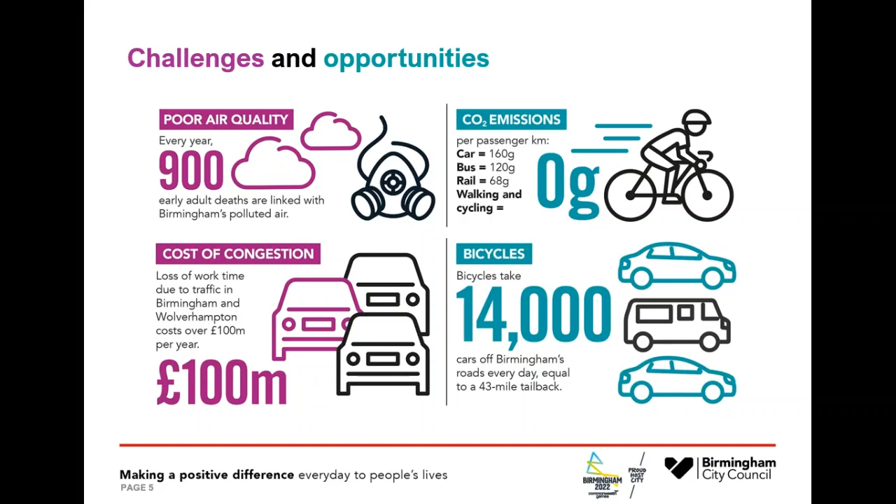Surveys we've done show that 76% of Birmingham residents support the principles of cycle tracks and cycle facilities across the city, and 65% would support that even if it means there's less room for other road traffic.

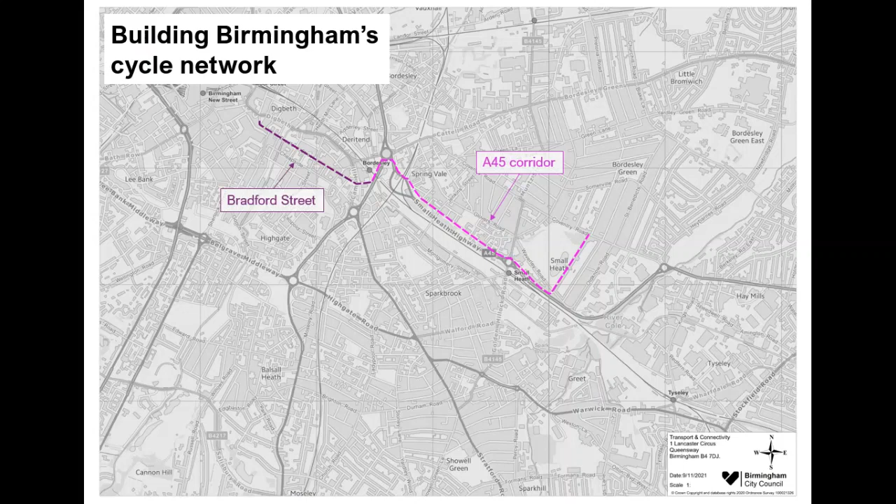This just shows how that fits into the wider context. There are already routes along the canal and along river valleys, which give more options and connect well to the routes we're talking about today. Off-road routes aren't always suitable because, particularly after dark, they're not so attractive, so we do need to try and get routes on the carriageway as well, in lit areas.

This also reflects longer term aspirations. Some of the dotted lines show things we would like to do in the future, which enhance connectivity and connect residential areas much better with things like employment, education, shops, and health facilities.

There is hope that there will be a phase 2 to the A45 corridor, subject to further funding coming in the next few years, which will also provide facilities on the dual carriageway section of Coventry Road, at least out to the Swan, and potentially even further in the future. But that's for the future, so we're focusing today on the section of Bradford Street and then the A45 corridor through to the park.

Okay, so I'll introduce now Alex Kernan, who's going to talk through the details of the specific proposals.

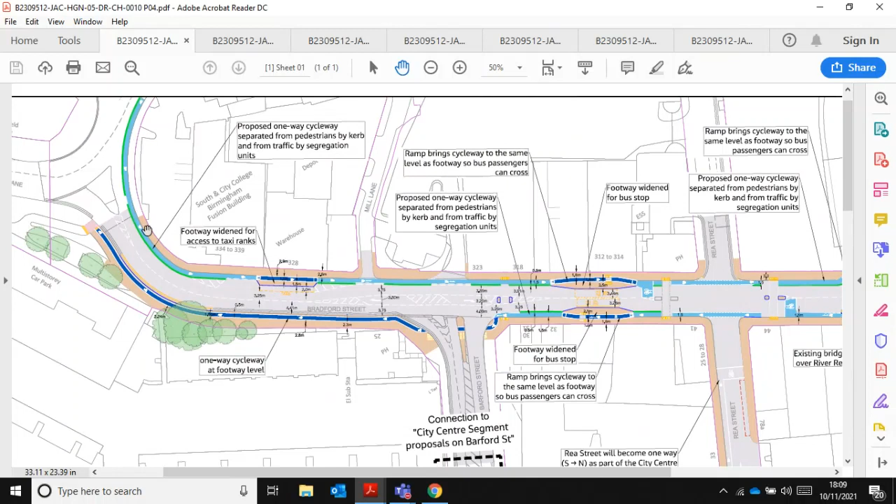This cycle route will be at road level, separated by a full height kerb. There are areas where the cycle route comes up to footway or pavement level, where we've got areas such as taxi bays, which you can see here. It just allows people to cross over the cycle route and safely queue for taxis.

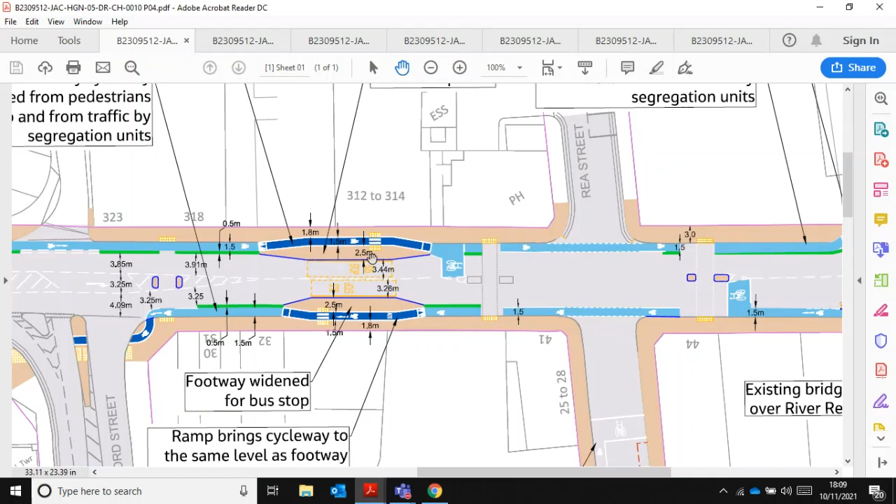We've implemented the same proposal for bus stops as well, where we've got a bit of a border there for people to queue and alight the bus. That creates a nice, safe space, segregated away from the cyclists.

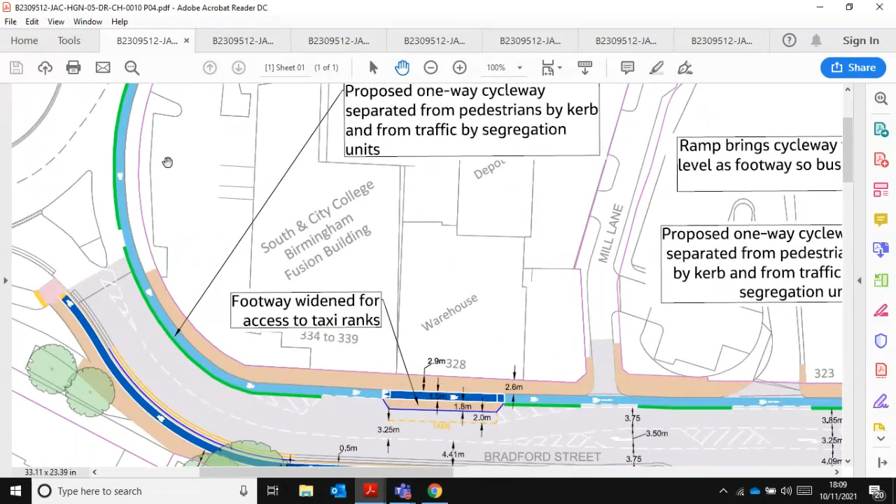Now the proposal is to allow cyclists through this route to have priority, as you would using a vehicle, so they will have priority at junctions. The plan is shown in blue at the moment for the whole route, but that is just for illustrative purposes only.

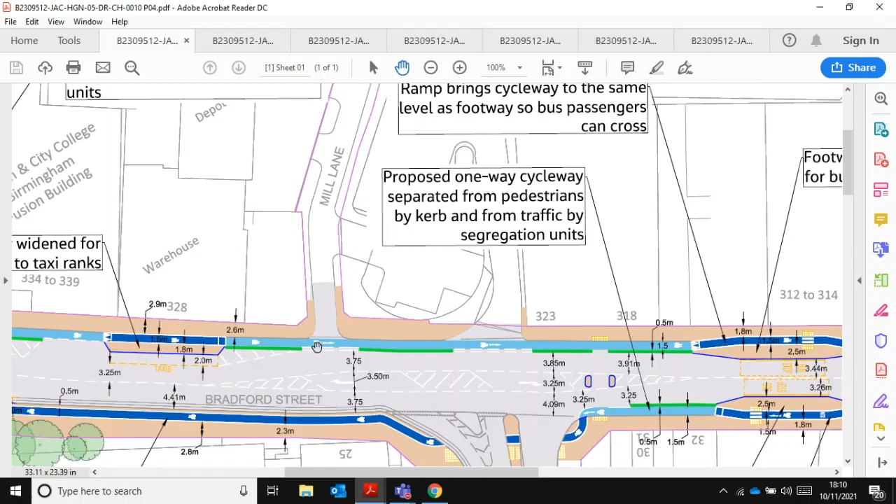What we're proposing is, where cyclists would be crossing over junctions, we'd implement blue surfacing there, just to highlight to vehicle users that there is in fact a cycle lane and that they're to give way to the cyclists. You can see that observed all the way through the route here.

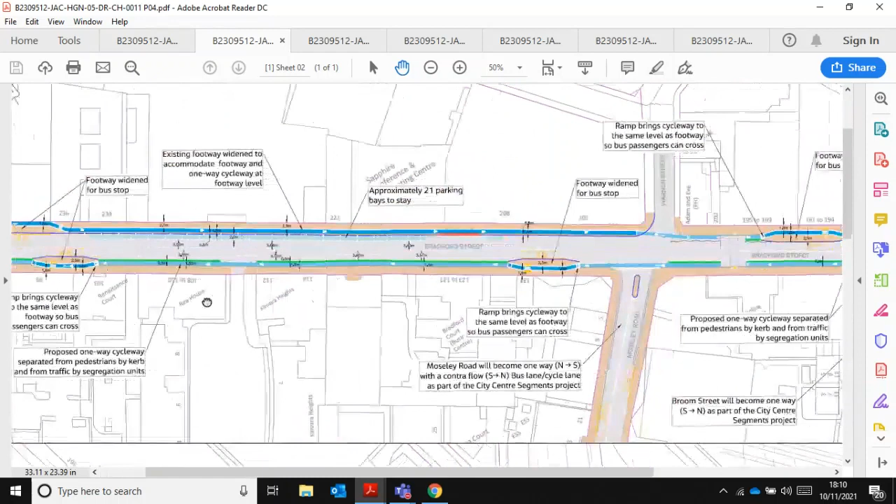There are some crossing upgrades further along the route. So what we'd need to do is just upgrade signals so that we could allow cyclists to have priority through the junctions here.

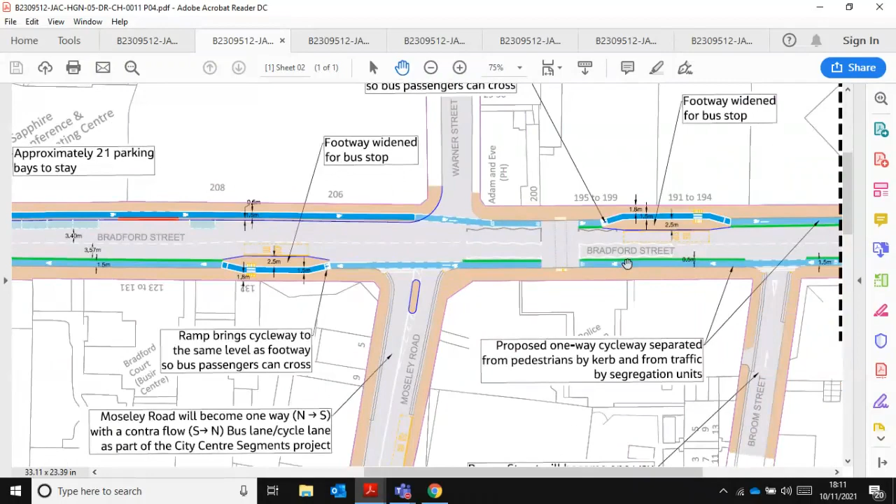We've also tried to retain as much parking as possible on the streets, because I know that's quite important as well. Where we can, we've kept the parking bays as per the existing, noted on the drawing here - approximately 21 parking bays to stay. We've tried to reallocate some of the parking bays on the southern side of the plans where possible, which keeps some of the parking in situ along Bradford Street for anybody using this route.

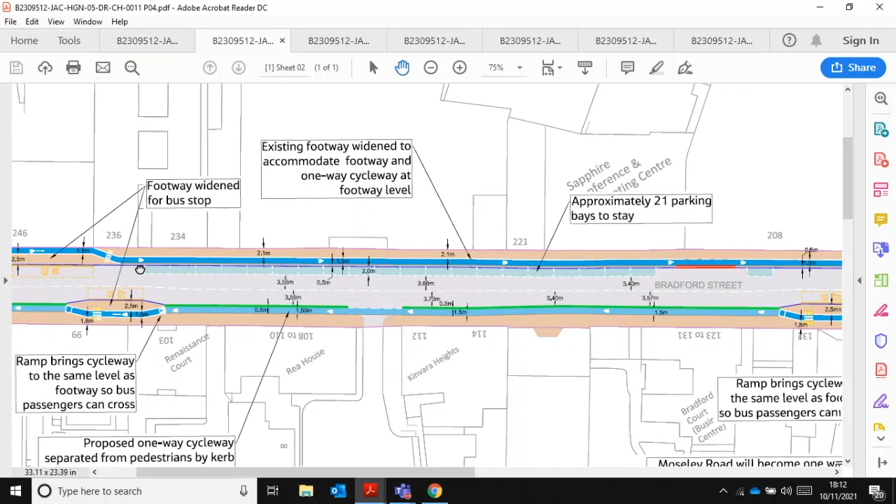So yeah, I'm just going back through the plan to the start there. As you can see, there are some areas where cyclists will be asked to rejoin the footway in a segregated capacity, and it will then be dropped back down in certain locations to carriageway or road level.

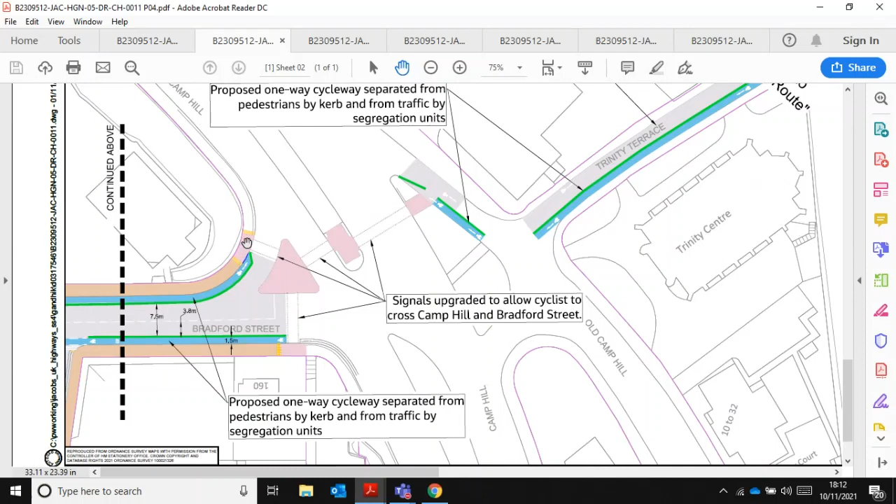That follows all the way down, past Warner Street, Moseley Road, past Broom Street, and takes you to the last part of the plan, where we've still got the with-flow route up to Camp Hill junction, where cyclists are asked to rejoin the footway for a little section of shared use on both sides, and then need to use the upgraded signals, which should be toucan crossings, bringing them back to Trinity Terrace.

That connects onto the A45 route that's currently on site. The A45 route is currently segregated by orange bollards, which you've possibly seen on site. Those are proposed to be replaced with actual curbs.

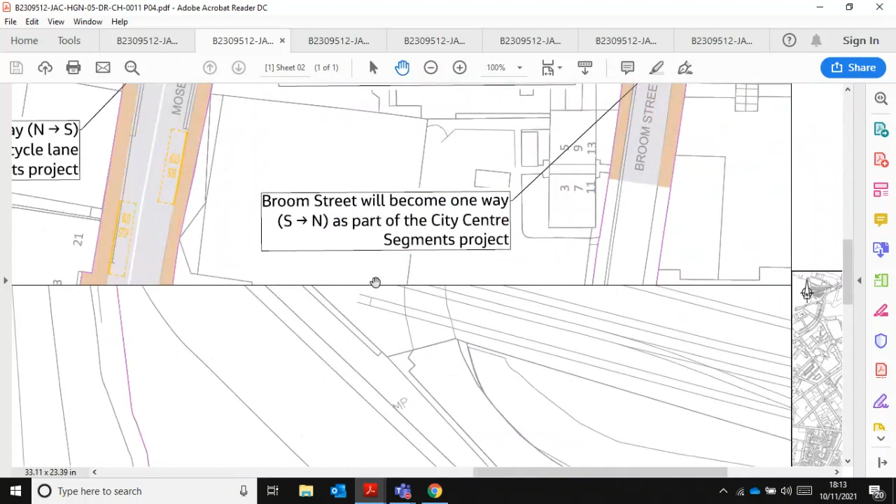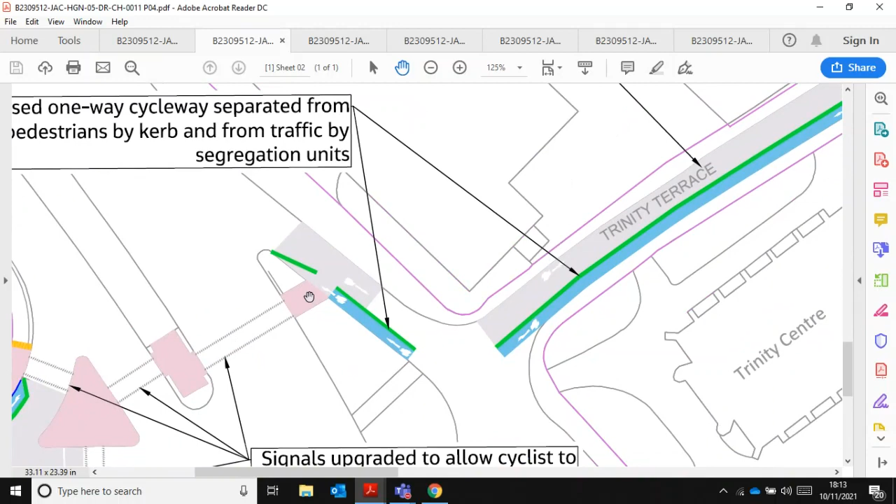So when we've got to the signalised junction here by Trinity Terrace, if you were coming from Bradford Street, you would then rejoin the carriageway for a section of on-street cycling. It would just be an advisory route because it's quite quiet around here, so we'd expect the traffic is quite low.

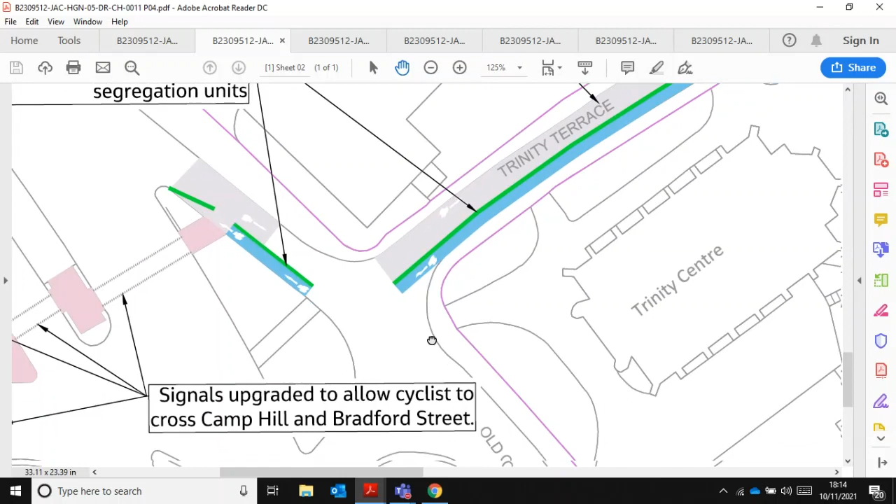If you were coming from the A45 scheme, which I'll go through in a second because that's where it ties in, you would be coming contraflow to the traffic along a segregated route, and then you would rejoin just to cross the oncoming traffic, which is relatively low through here because it's just a little bit of a slip road, so not heavily trafficked. It would just be a bit of a crossing and then back up to the Toucan crossing where you could use the Bradford Street facility.

Hopefully that will encourage cyclists to start using this route. And that's Bradford Street. So what I'll do is just continue onto the A45.

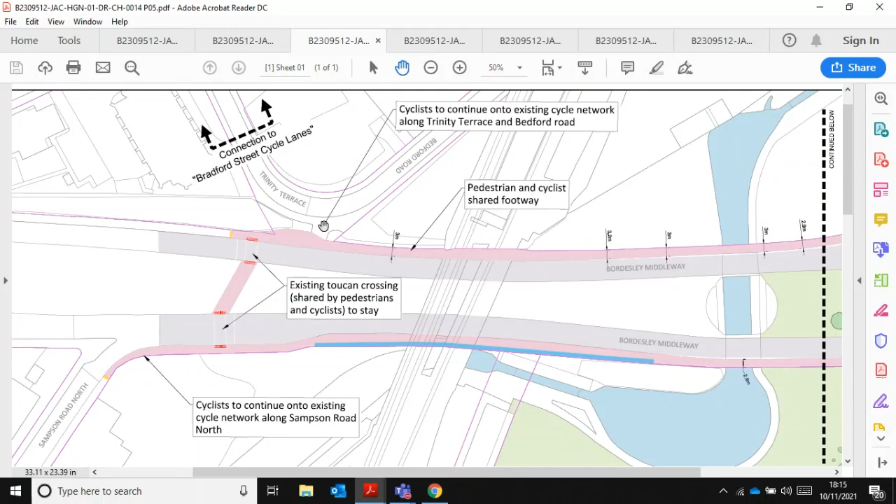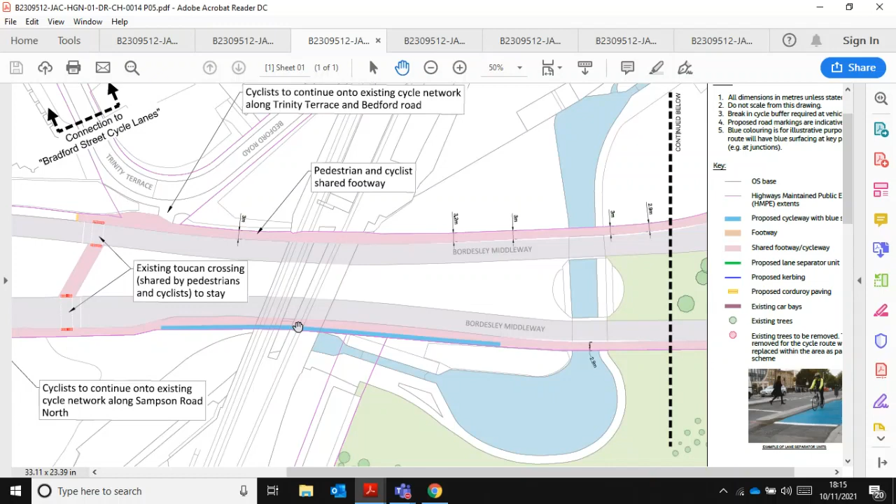On the A45, we've got the end of Trinity Terrace here, where the other drawing finishes. That connects onto the Bordesley Middleway here, where we've got an existing toucan facility. What we're actually proposing to do is extend the shared use footway, where you can see the pink space. Shared use means both cyclists and pedestrians can use the existing footways, so they won't change. It's just a case of allowing cyclists to use those pavements as well as pedestrians.

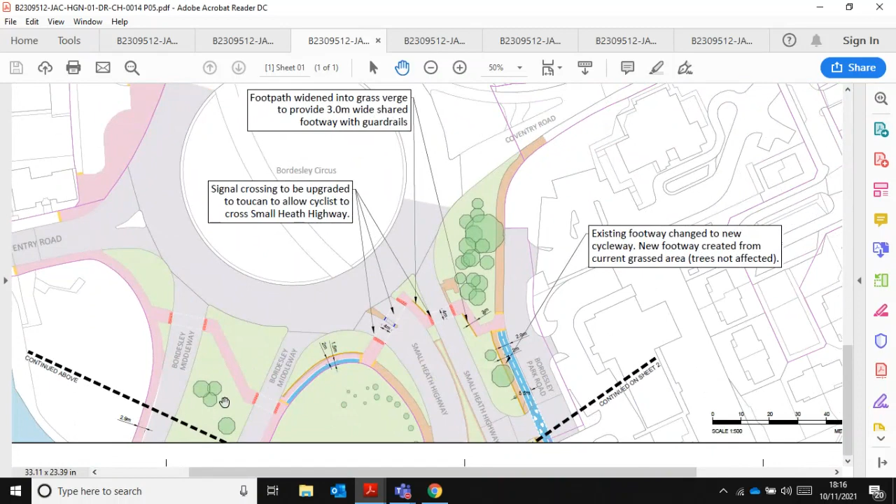So then the scheme plan rejoins here at the end of Bordesley Middleway, junction to Bawdsley Circus Island. This connects onto other existing shared use routes along Coventry Road, etc. But our scheme for the A45 connects on here.

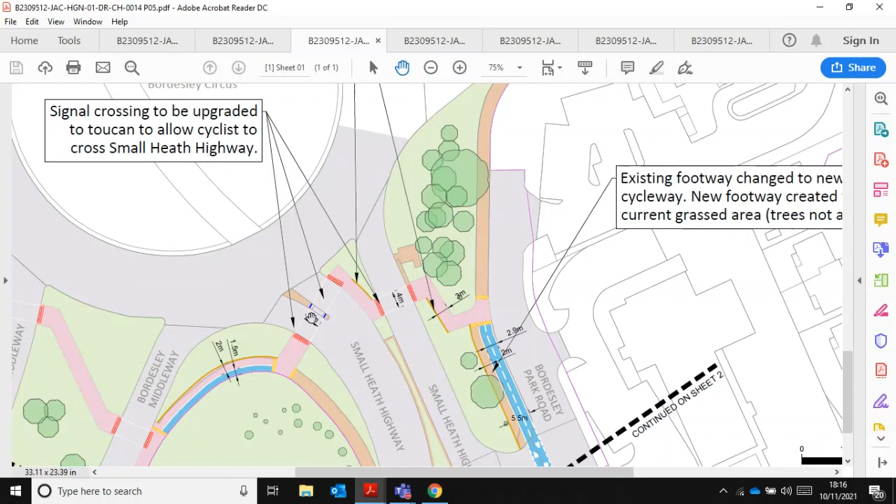We've got an area where we've got a little bit of segregated cycleway, segregated from pedestrians, just on the corner of Bordesley Middleway to Small Heath Highway. We've then decided to upgrade the crossing at Small Heath Highway to a toucan, so again that's for pedestrians and cyclists to cross over and use the existing traffic signal facilities, but it'll be slightly wider to accommodate the cyclists as well, just so there's a bit more room.

So cyclists can cross over the Small Heath Highway and then join onto Bordesley Park Road, where they will be in their own segregated facility away from the pedestrians, which will be in both directions.

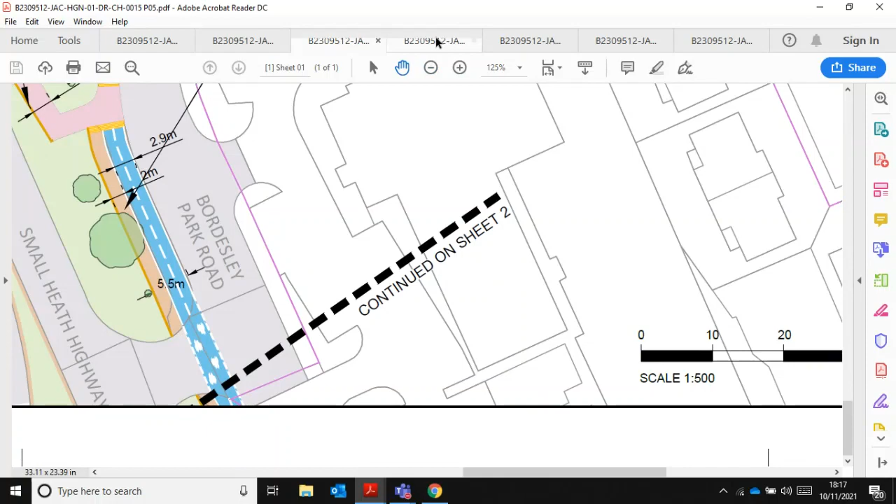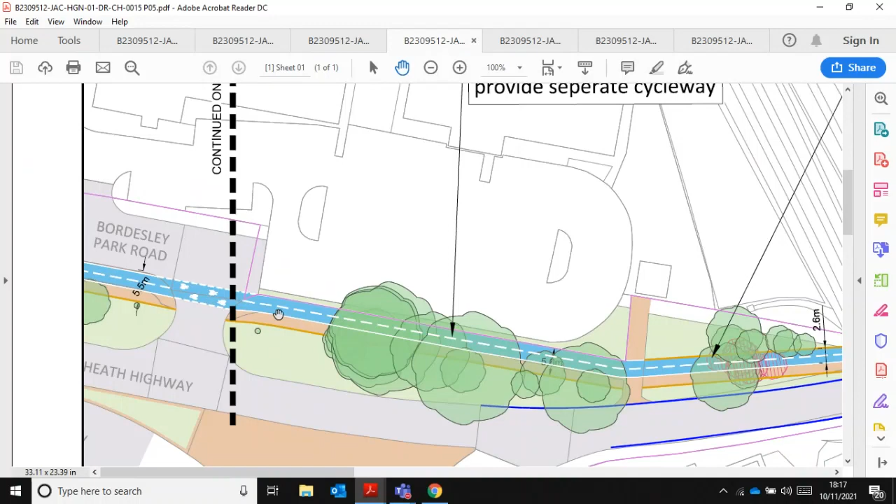If I just carry on with the plans, you can see we've just tied into Bordesley Park Road here. We're proposing that the two-way cycleway continues as per the existing pop-up route through this section.

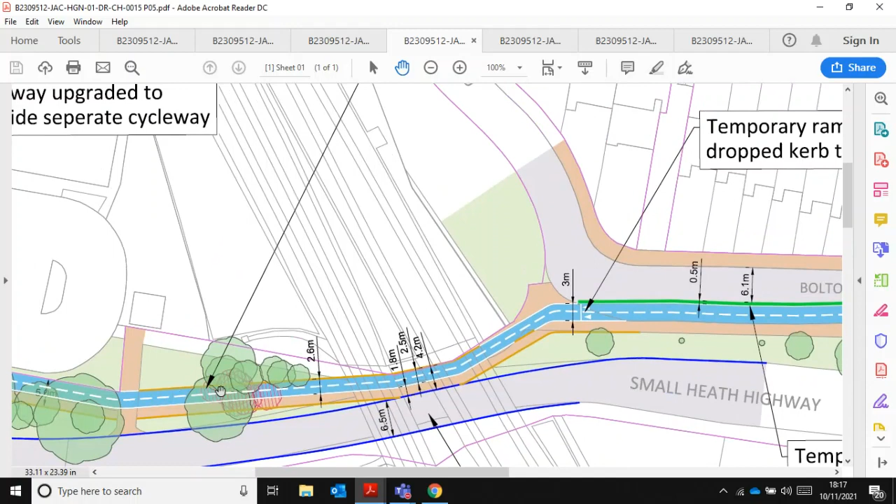We're going to formalise the section just under the railway bridge as well. So rather than just having matting through there, we're going to do some paving and tarmac through here, just so we can increase the longevity of that section.

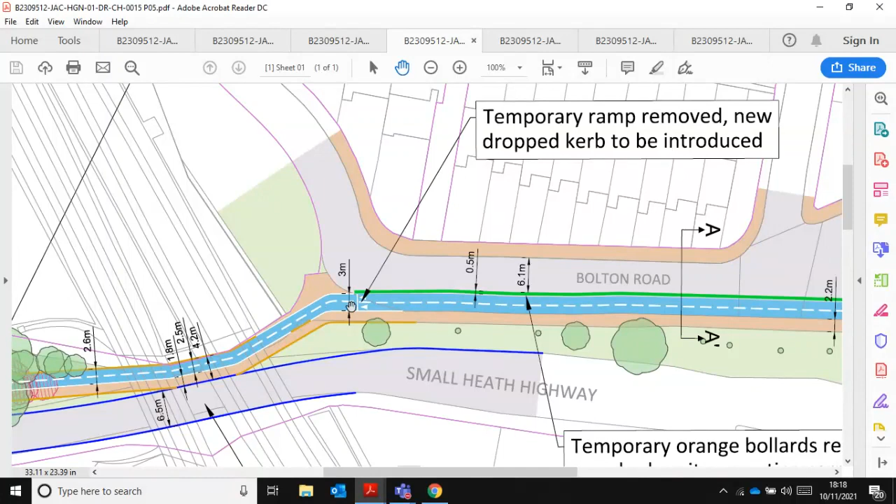We then come under the bridge up to Bolton Road, again just following the existing bi-directional or two-way cycle route.

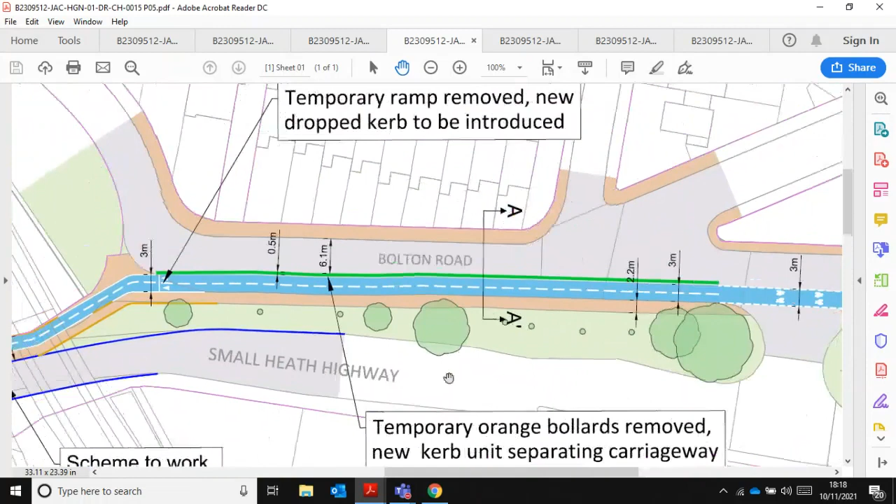Now, Bolton Road is one way currently with the pop-up route. We're actually proposing now that we will reinstate the two-way, which will make it easier for residents. We've listened to the feedback we've received and taken that on board, so hopefully that will ease any issues on Bolton Road currently.

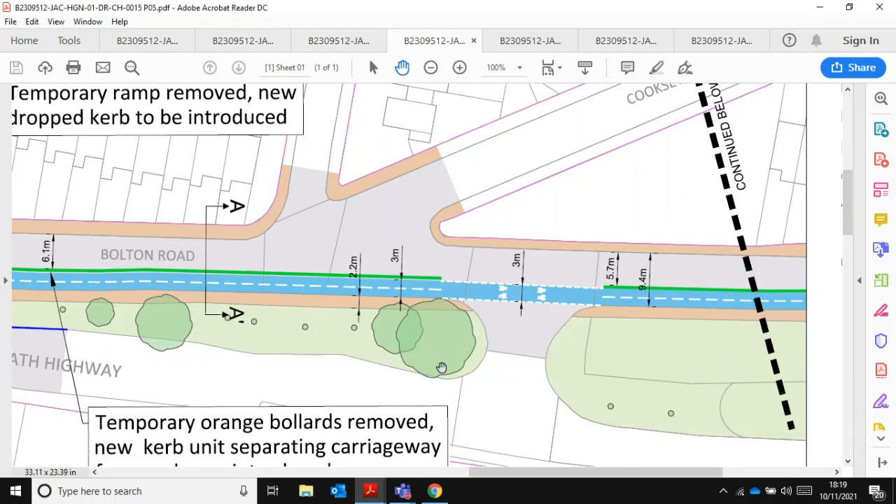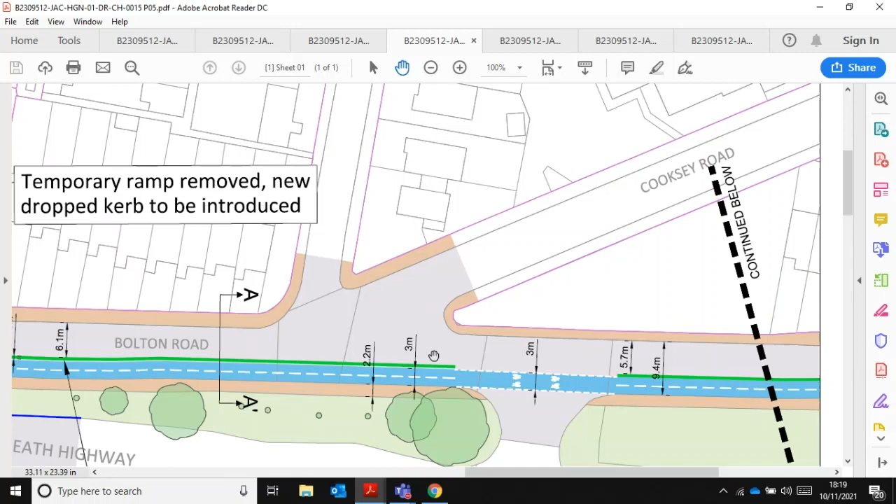So with the Bolton Road cycleway, we've shown the segregated kerb. Obviously, we will allow for some gaps in these kerbs just to allow cyclists to alight and gain access if they need to, if they live in the local area and they've cycled into Birmingham. It just gives a little bit more access to join the route.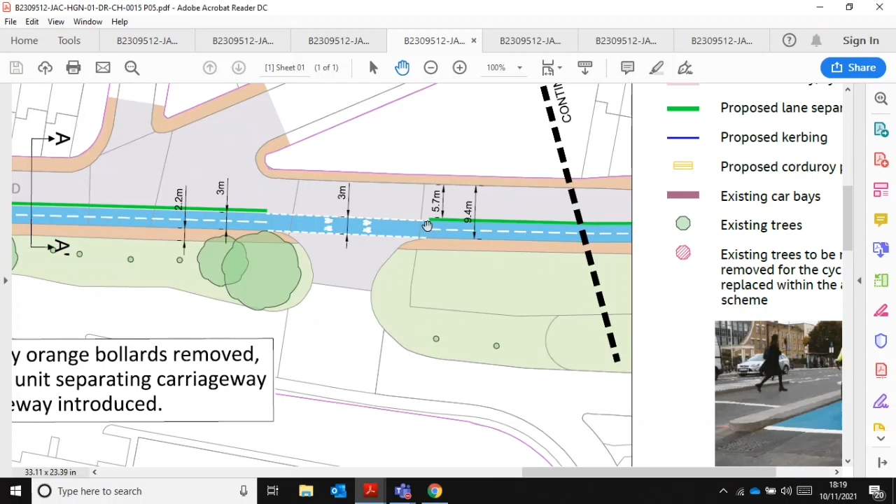As I say, at junctions we will have the blue surfacing through the junction, because cyclists again will have priority where junctions are situated, and it just shows vehicle users that they need to be aware of cyclists. So I'll continue on.

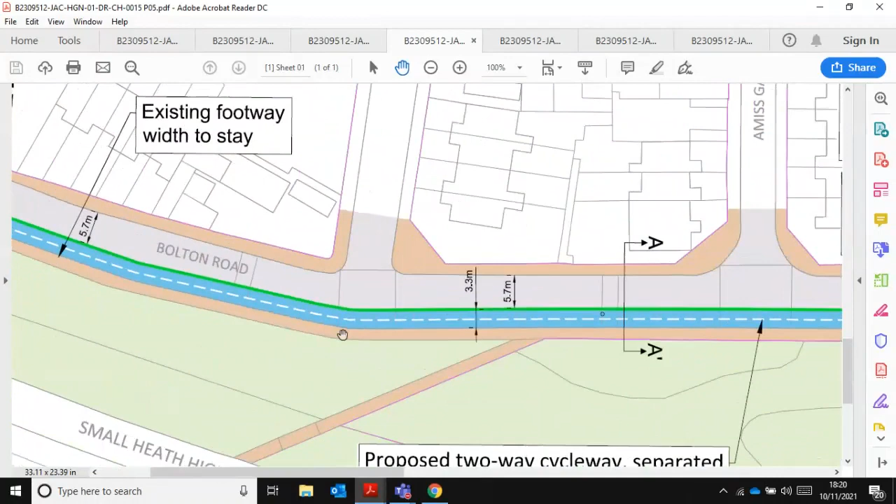So showing the rest of the length of Bolton Road here, again with segregated curbs. Didn't mention that this will be at road level as well, so it won't be at the footway level, and the footway will still be usable as it is now.

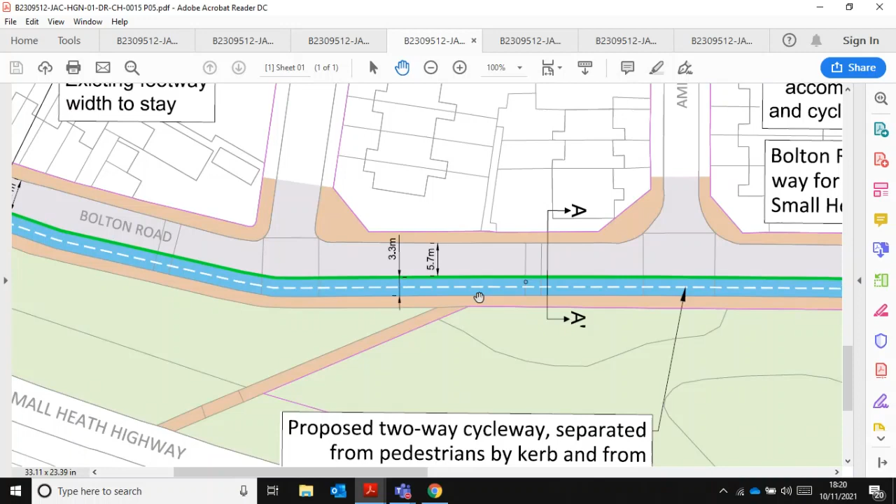So you'll just have a cycleway next to it rather than having the traffic. But again, as I say, it will be two-way along Bolton Road as well, so we've managed to fit that in.

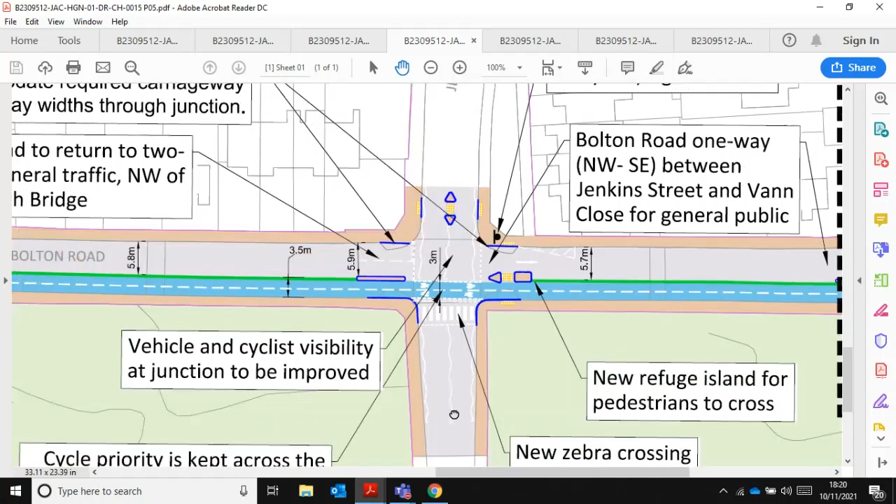This is where we have made some additional changes from the existing layout of the Small Heath Bridge junction to Jenkins Street and then Bolton Road towards Vann Close. I'll just go through that now.

What we're proposing is to change the priorities at this junction, as we feel it may flow better. On Bolton Road, vehicles would be expected to give way to oncoming traffic from Jenkins Street or Small Heath Bridge, so Jenkins Street and Small Heath Bridge would have priority straight across. That's not how it's operating now.

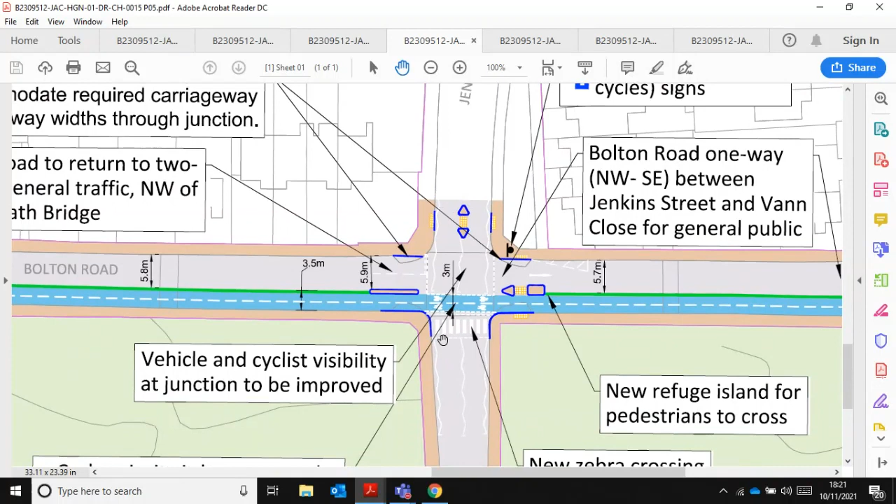At the moment Bolton Road has priority, but we feel it would be more effective to have Jenkins Street and Small Heath Bridge with priority, to allow the junction to flow better and have a bit more visibility, because some comments we received were that vehicles are protruding onto Bolton Road because of the wall just beyond here. So rather than cars edging out into oncoming traffic, it would be better to give them priority, since Bolton Road has a bit more visibility at the junction.

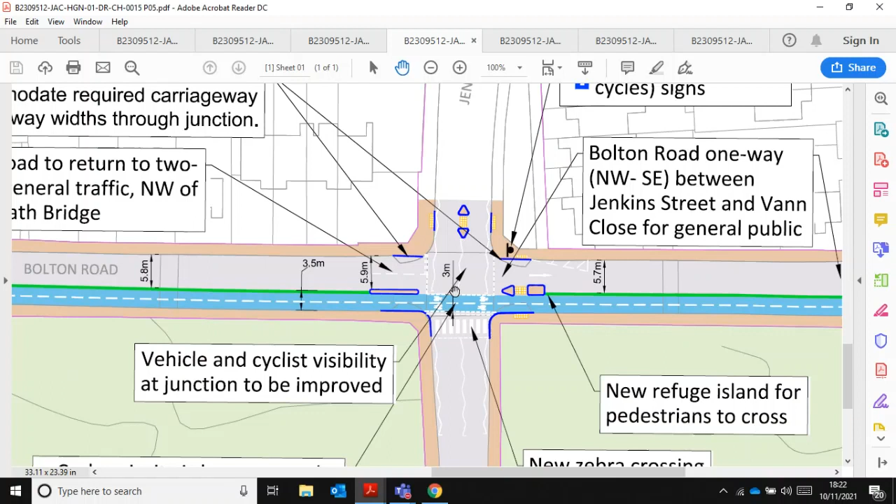So that's what we've suggested. This side will still give way, so you can turn left out of Small Heath Bridge onto Bolton Road, and you'll be able to come out of Bolton Road as previously, before the pop-up route was here.

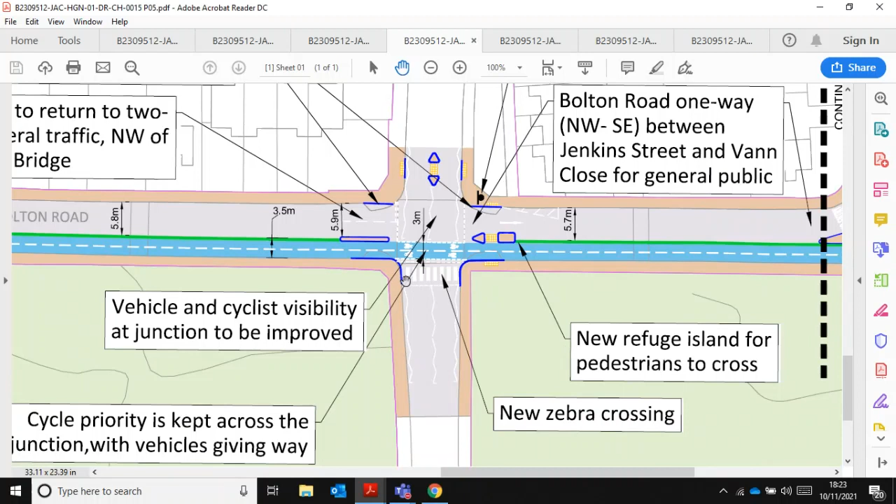We've got the proposal of a crossing for pedestrians and cyclists here. We've proposed that cyclists have priority again across the junction, just because it gives a bit of continuation and makes the route quicker for cycling. We've also proposed the pedestrian crossing here, because I think it's quite well used, so it's creating a better crossing facility.

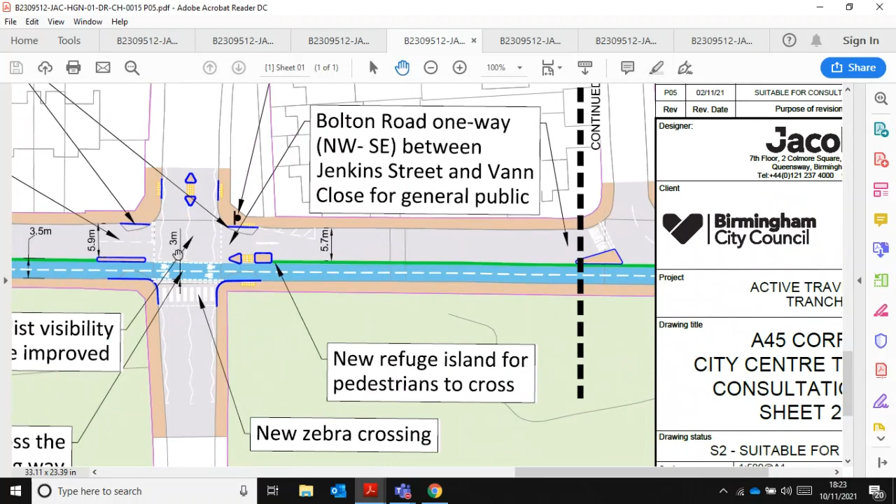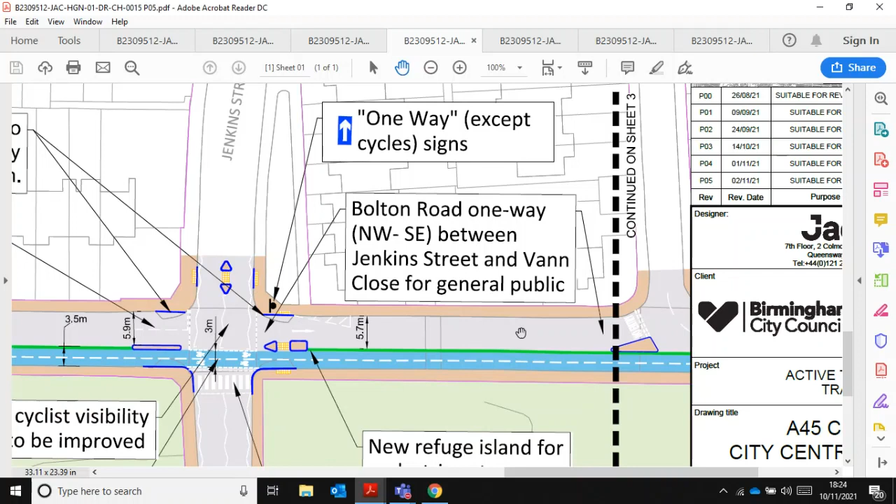This is where we've proposed to keep the one-way section, between Bolton Road and Vann Close, and the junction of Jenkins Street through to Vann Close, just to reduce the movement at this junction for vehicles. You'll still be able to come down Jenkins Street and turn left and right, but you won't be able to come from Vann Close along this section through to Bolton Road. It's only a localised alteration here.

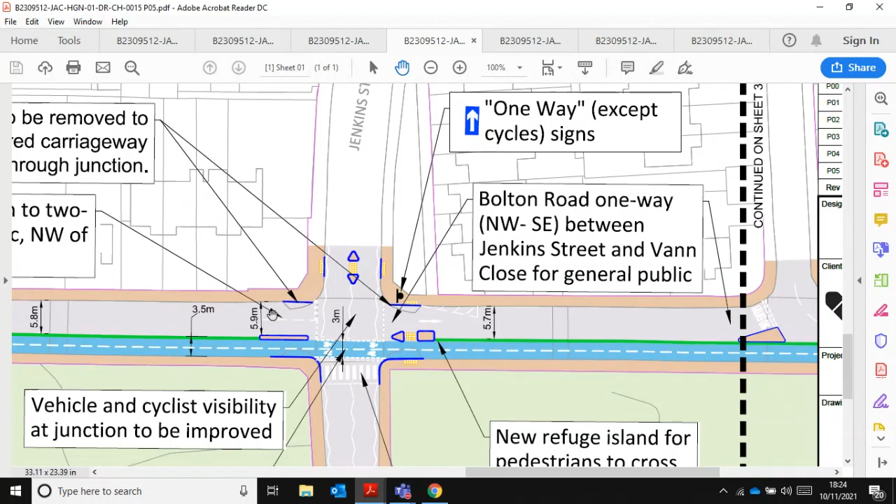So if you were travelling down Vann Close to get to Bolton Road, it's just a small diversion up to Vann Close and then onto Jenkins Street, and then the two-way can be used. But it's just to reduce those movements, to keep everybody safe and give that safer feeling at that junction.

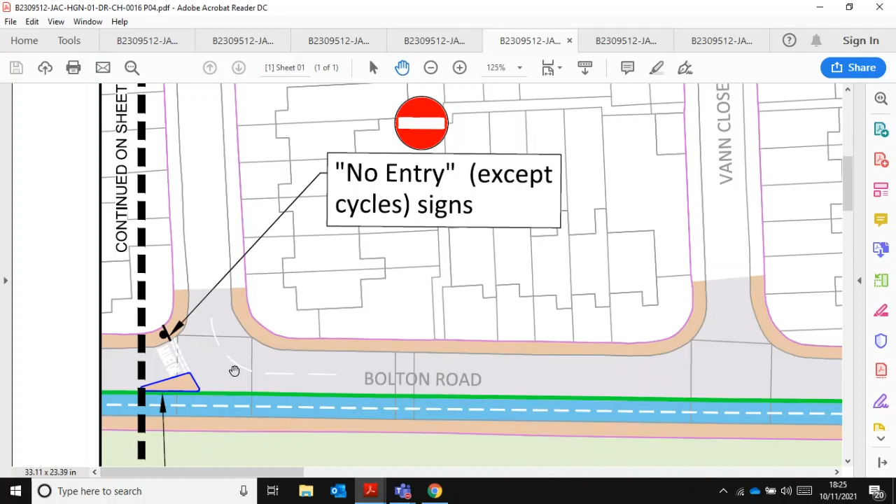I'll move on to the next drawing. As discussed, we've got that no entry here. We've proposed to do a little build-out on Bolton Road, just as you get to Vann Close, and then you would sweep up here as a vehicle user, and use the Jenkins Street route if you needed to get to Bolton Road on the opposite side.

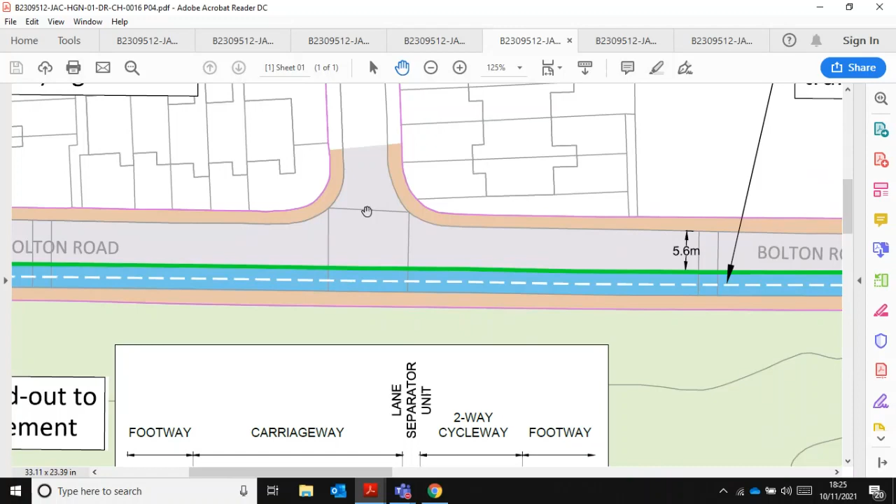Looking at the cycleway again, it's two-way along this stretch of Bolton Road on the opposite side. We will again leave gaps at junctions so cyclists can easily manoeuvre in and out of the cycle route, giving better connectivity into the residential areas for those who'd like to cycle into the city. That will again be at road height.

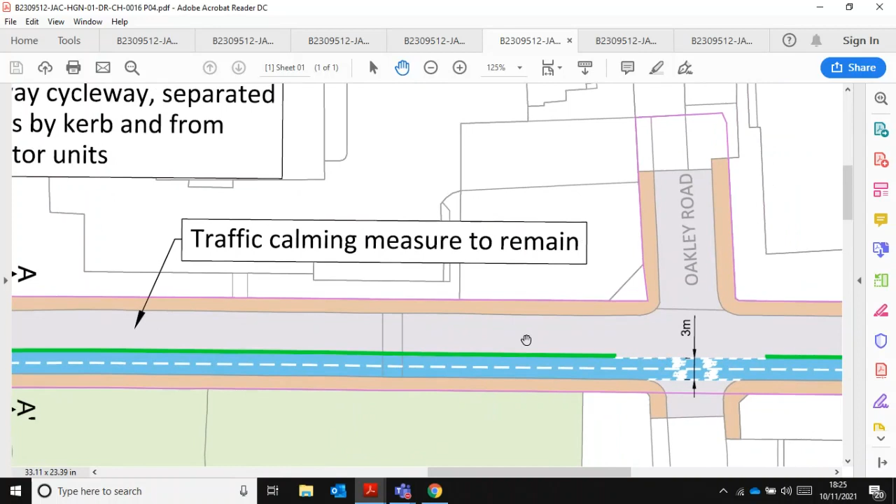Traffic calming measures will remain, which is a note we've put on the drawing. That's as per the existing - we haven't changed anything there as part of the pop-up or this scheme, so they're just in situ.

We get to Oakley Road, and again we've provided some line markings, and also we'll be providing some surfacing here to show that cyclists will in fact have priority along this route.

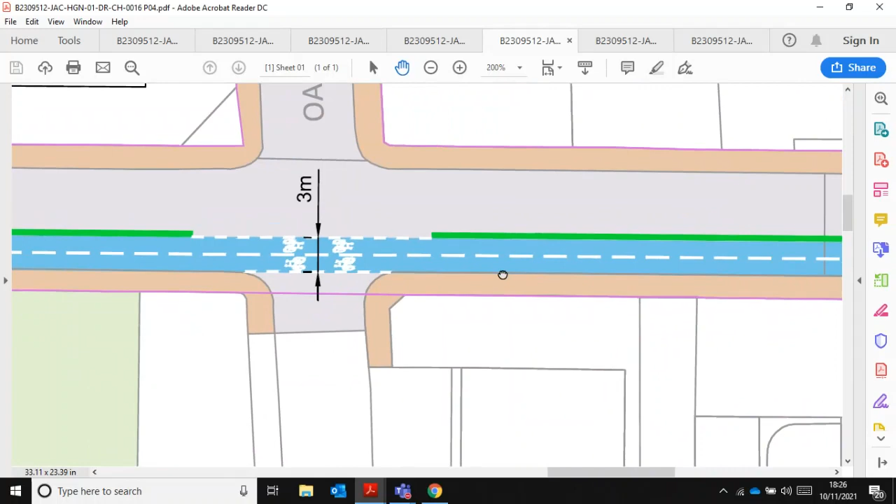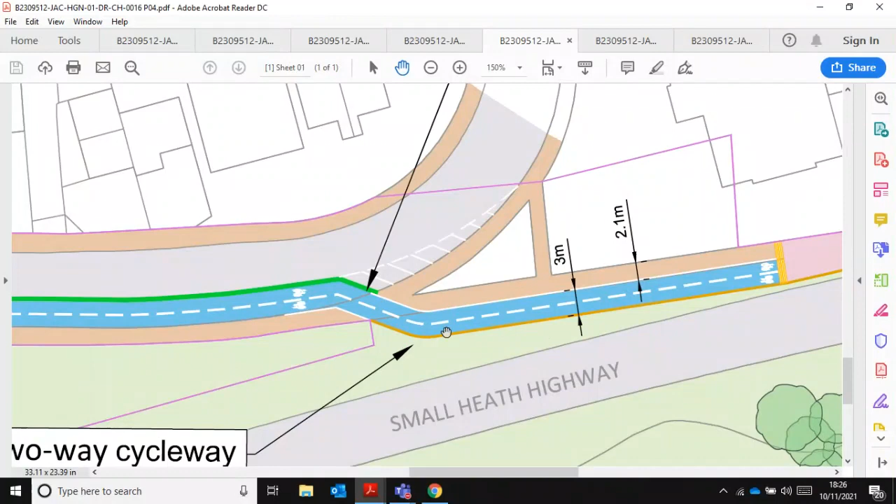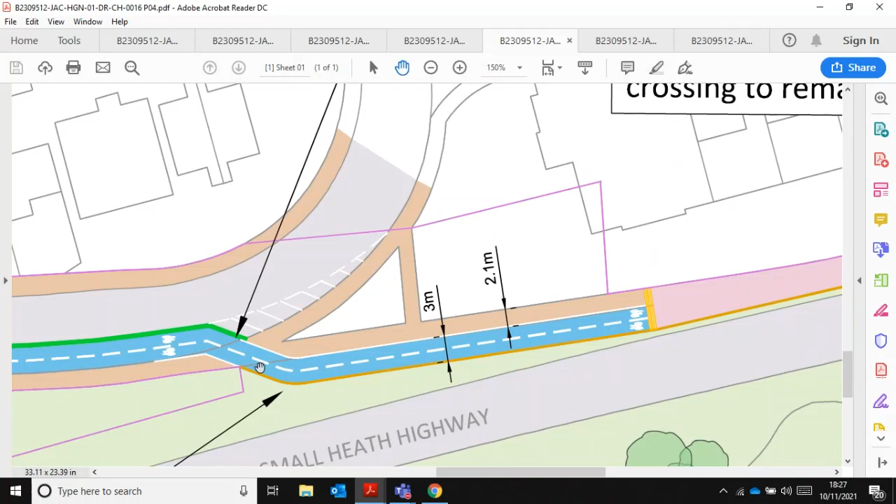Then we get to the end of Bolton Road, again following the same alignment as the pop-up scheme here. What we'll do is plan to widen the grassed area to facilitate a cycle track. This cycle track will be raised from this point up to the level of the footway, so it'll be at that same level, and it's proposed to be segregated again from the pedestrians who would be using this pink section.

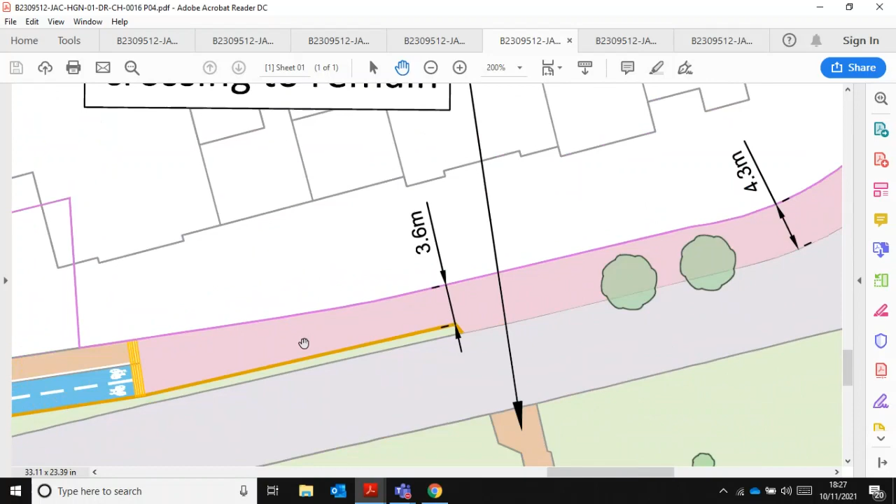That takes you up to Golden Hillock Road, pretty much. Where we've introduced those orange lines, that's tactile paving to denote that this section is for shared use - for cycling and for pedestrians through this route here.

And that goes up to an existing toucan crossing facility, which is again for cycling and for pedestrians. Scoot over to the next plan. So then cyclists would be crossing over here with the pedestrians.

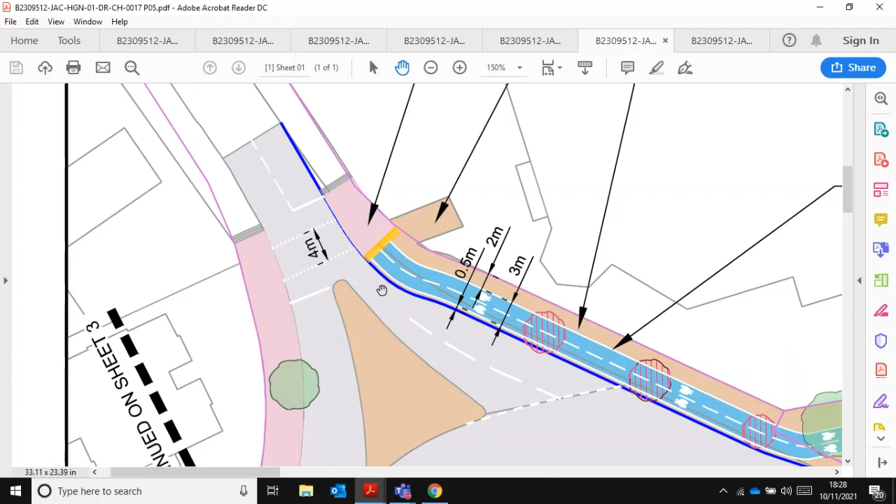What we've proposed here is that we introduce another section of segregated cycle route at footway or pavement level. It is two-way, and that's just outside the mosque.

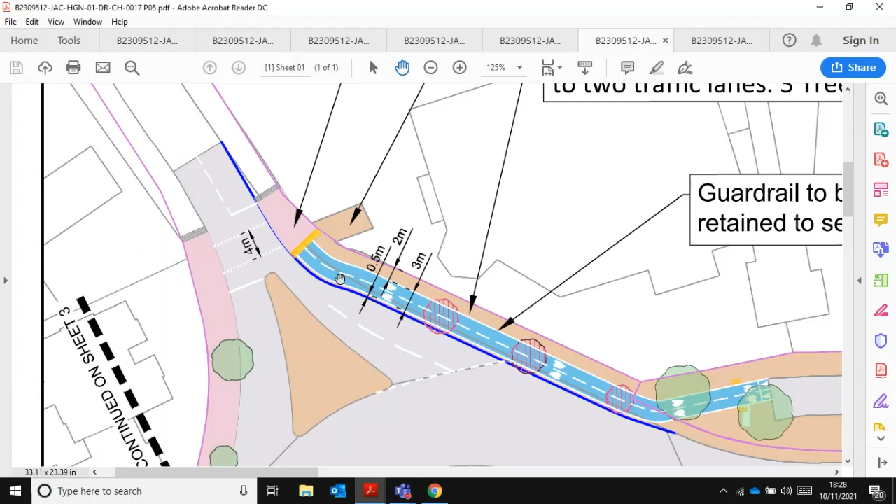So to accommodate the width of the cycle route here, we have proposed to take out the left turn lane on Golden Hillock Road. This gives a bit more capacity in the footway, so we're not losing out on footway space, which is needed in this section, but we're allowed to introduce a nice section here of two-way cycling, to provide that extra connectivity and make it a little bit quicker on the route because it's segregated from the pedestrians.

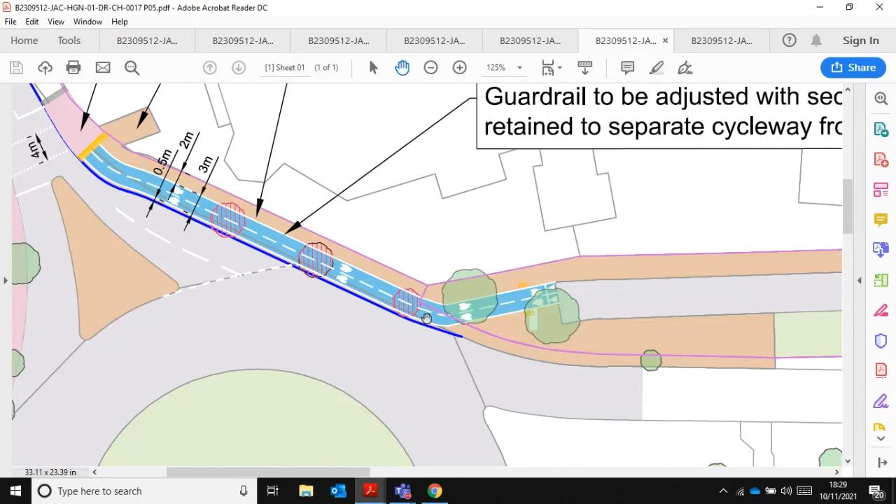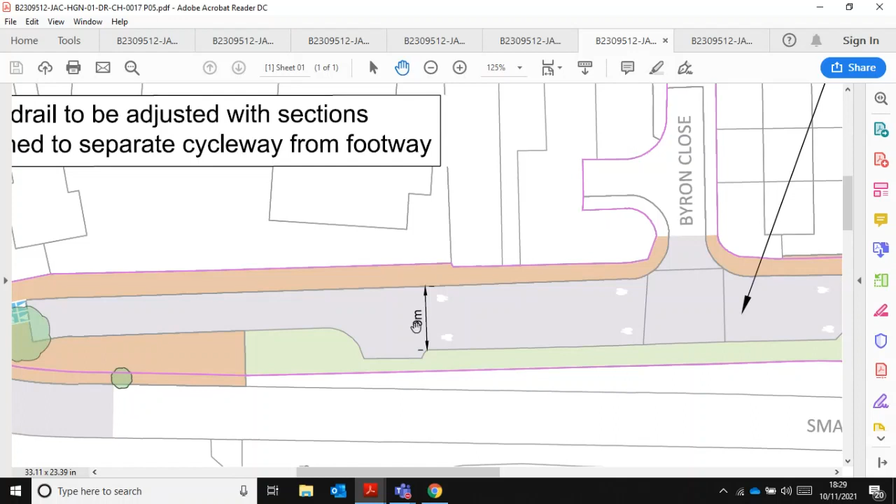So then the cycle route comes down onto Byron Road. On Byron Road, we had some feedback again about the pop-up cycle route that we currently have in place. We have listened to that feedback because I know that with the school being there, it can be quite difficult with parking and things like that.

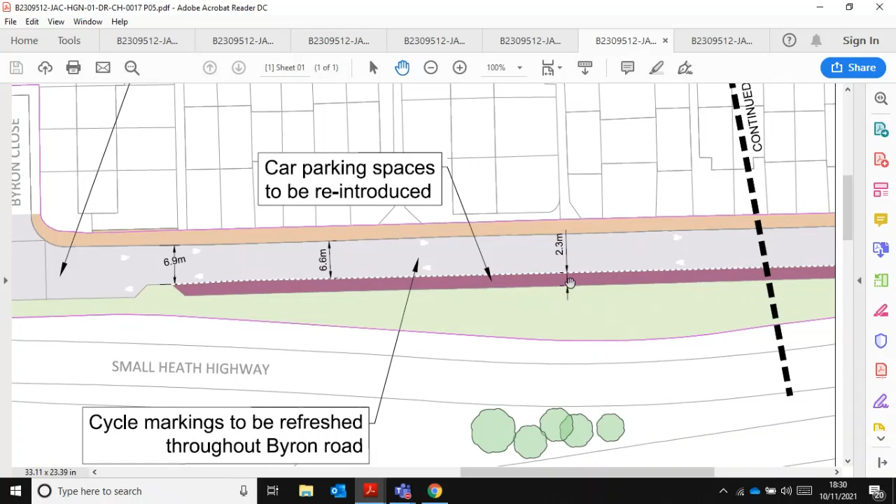So we've found that because this road is quite quiet, mainly residential, it would only be at peak times when there would be the majority of traffic. So what we've said is that we'll take out the cycle route that's currently there and reinstate the little parking bay that's existing. We wouldn't change anything in the parking bay, we would just remove the bollards and it would go back to the existing arrangement.

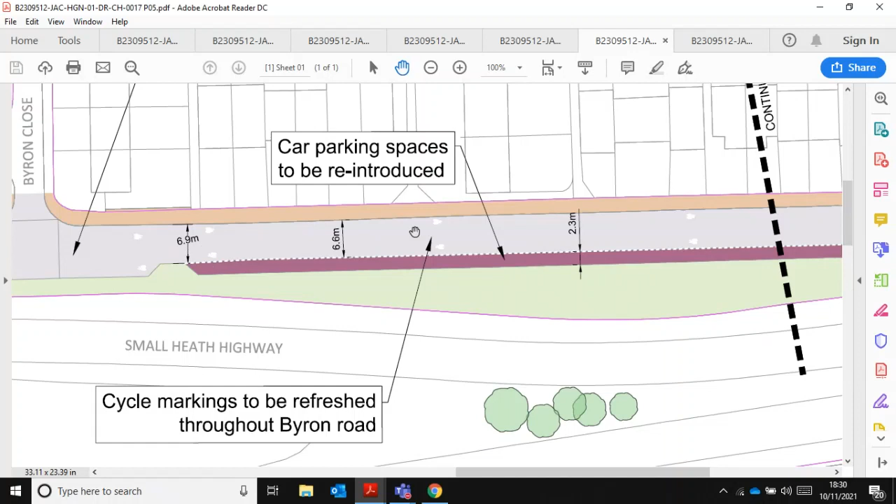The cycle symbols will still stay on the road because it highlights to vehicle users that this is actually a preferred route used by cyclists, and it gives a little bit more awareness of anybody opening car doors, etc.

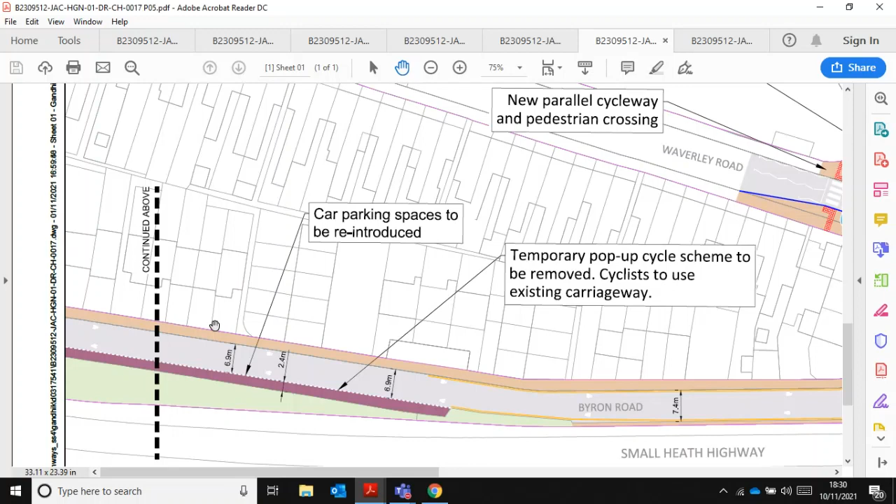So that's that section on Byron Road. Again, just showing that we are reverting back to the pre-installation of the pop-up route, so that will remain the same. We have included a section of double yellow lines along Byron Road.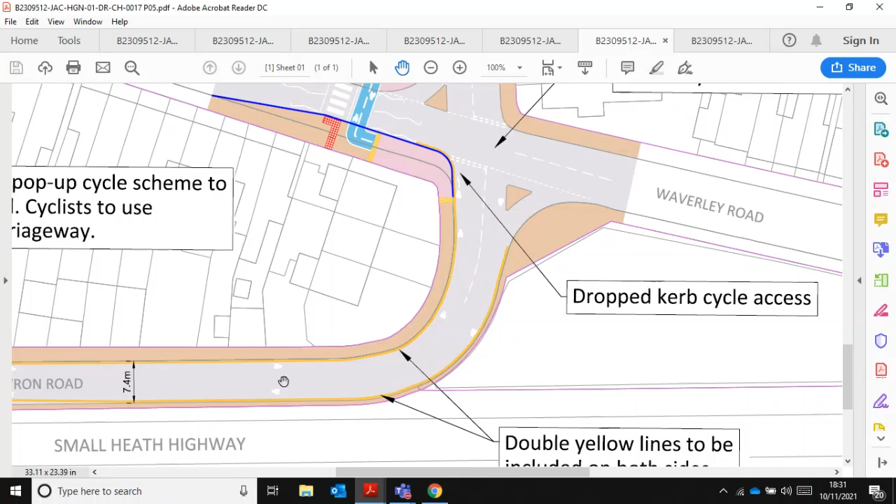Because there is a bit of an issue of visibility around this corner here since it's two-way, and it does get quite built up with traffic, it would be better if we didn't have parked vehicles here, just from a visibility point of view, safety point of view, etc. So that's what we've introduced there.

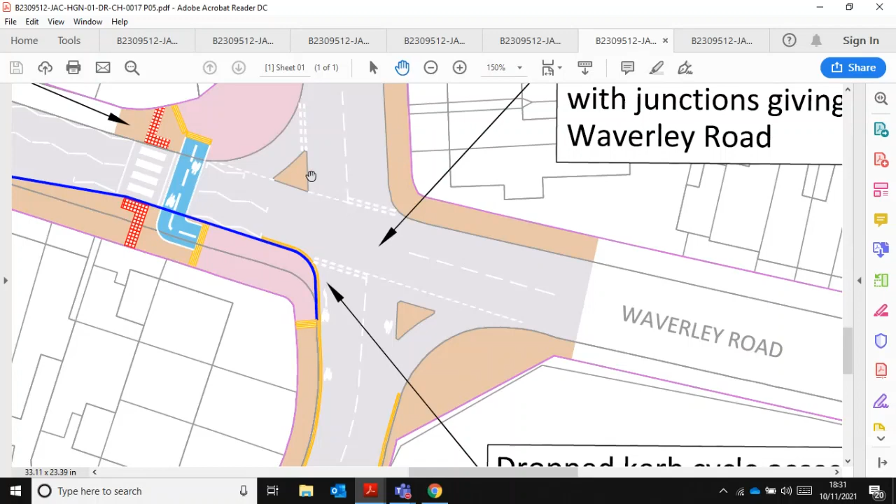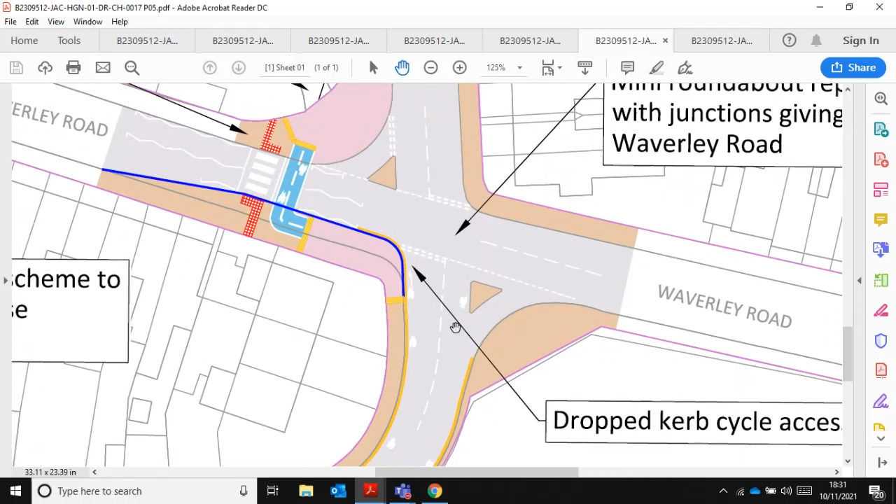So at the end of Byron Road, at the junction to Waverley Road, we're proposing to change the mini roundabout that was there previously to a junction instead. It gives a bit more ease of movement at this section. We think that this would operate better as a junction arrangement rather than a roundabout.

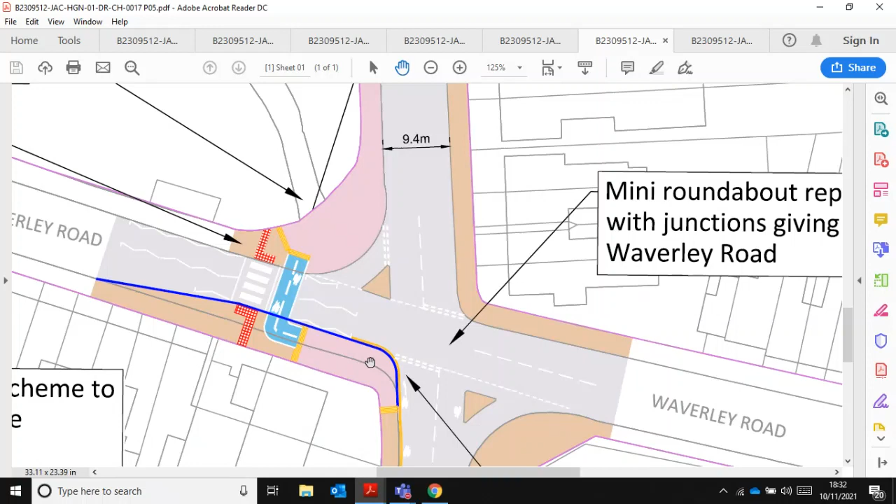What we've proposed also is that we build out the footway on Waverley Road to accommodate a section of shared use for cyclists. So cyclists would be able to utilise the advisory route, rejoin the footway or pavement, and then use a crossing facility that we'd like to introduce across Waverley Road to provide a nice connection into the Small Heath Park.

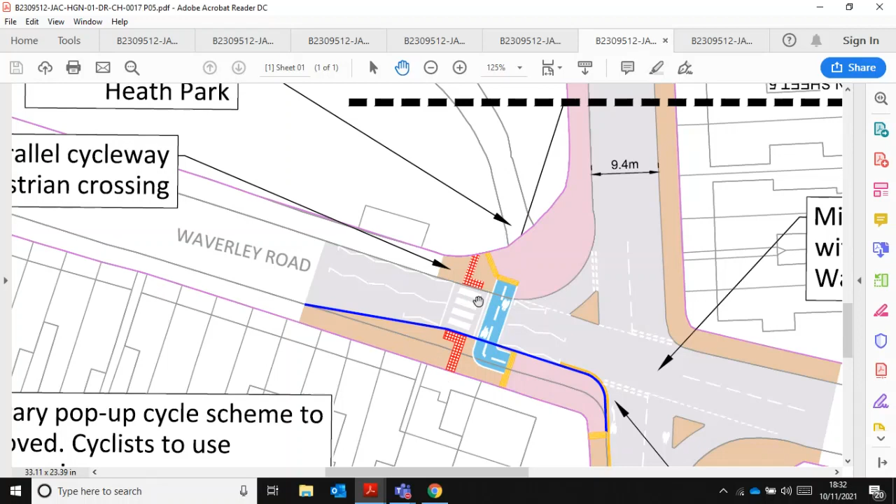We've also suggested introducing a crossing for pedestrians at this section as well, just because one doesn't exist in the current arrangement, and we feel that would be a benefit to allow pedestrians to cross over safely to the park.

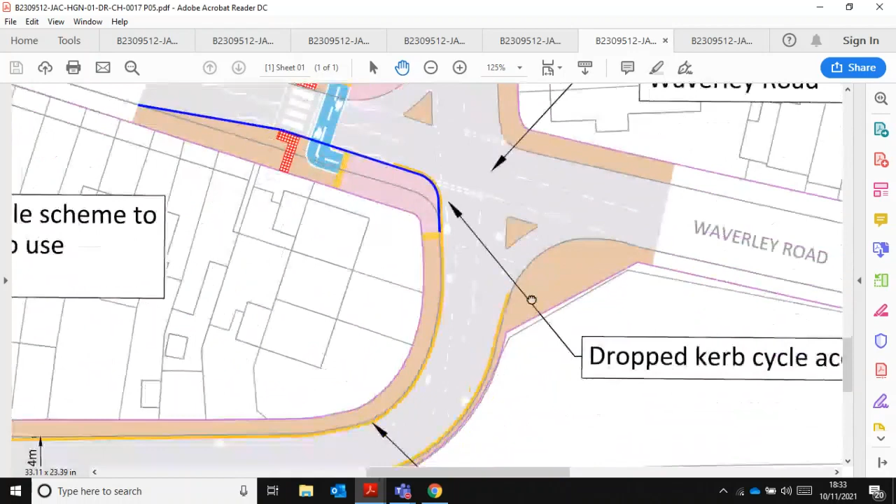So near the end of the plans now, I'll just skip on to the next one, which shows Tennyson Road. Again, we've listened to the feedback we received for the suggested pop-up route here. We are proposing to leave Tennyson Road as it is, with just the section of shared use for cycling and pedestrians on the footway as per the existing.

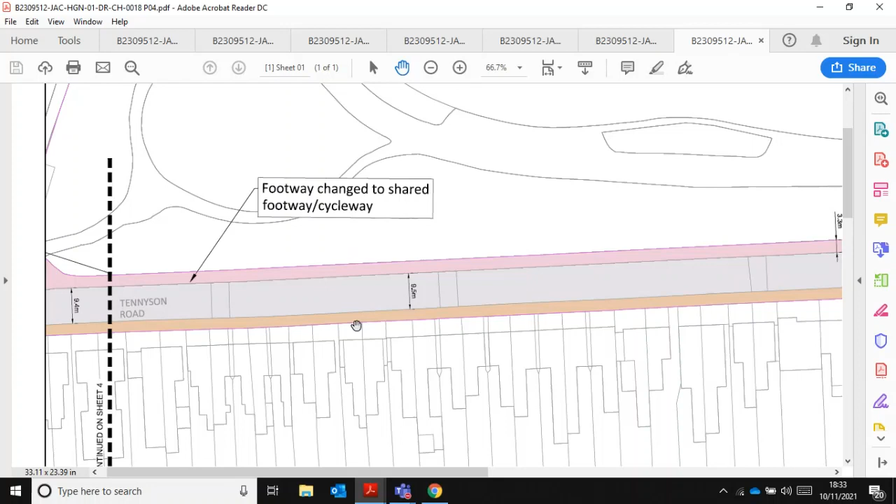So we will not be widening the footway there. We won't be taking out any parking or reducing any capacity there. That will remain the same, but it still allows cyclists more freedom to utilise that park, able to access a little bit easier if they can use the footway in a shared capacity.

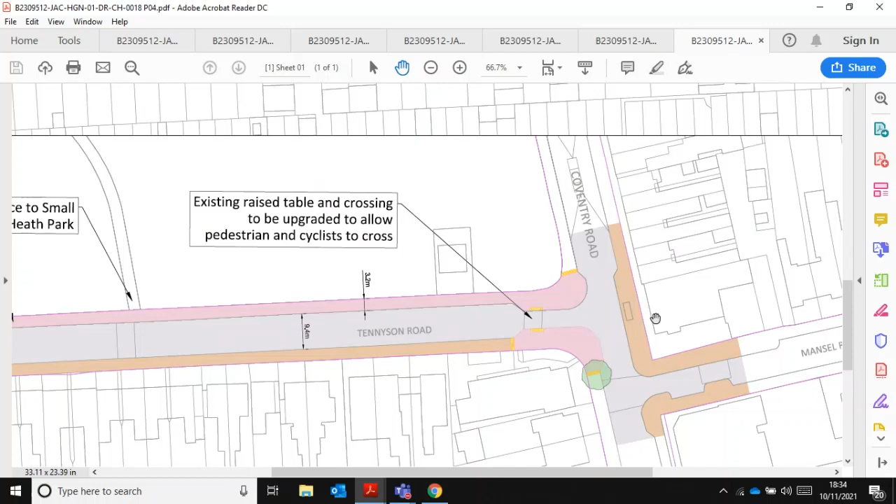And the scheme will then end at the junction of Coventry Road, where we're proposing to install a crossing point with a raised table, to allow pedestrians and cyclists to cross a little bit easier and connect onto Coventry Road a bit better. So that's the cycleway routes for Bradford Street and the A45.

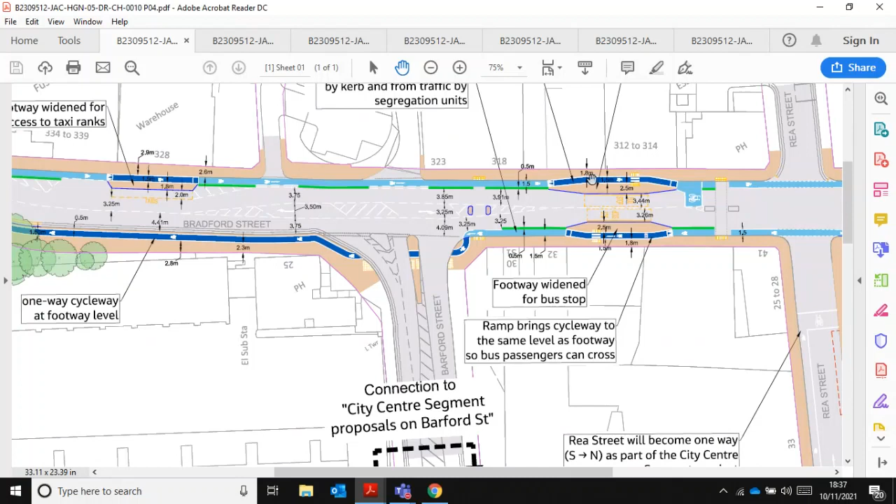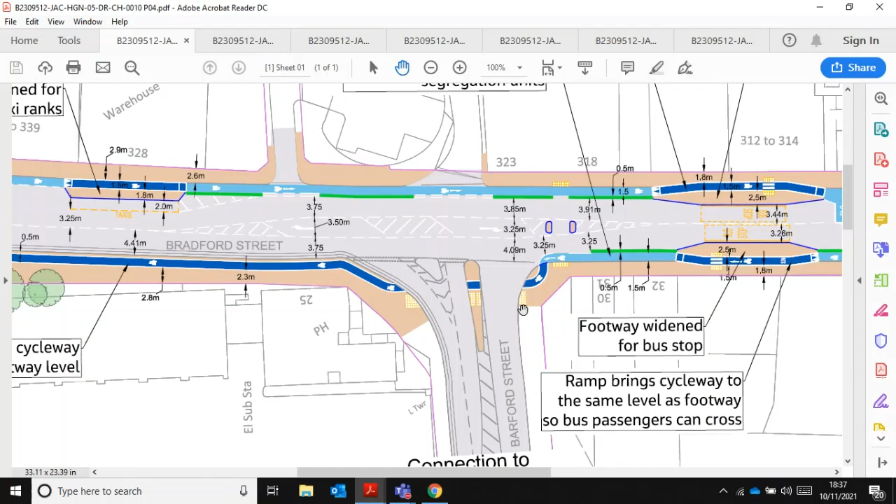In terms of crossing points, they would stay as they are for the most part for pedestrians, though there will be some reshuffling of crossing points to accommodate the cycle route. But yes, they would be as per the existing arrangement. We could consider them in certain locations if you wanted to make suggestions, if necessary. I don't know if Andy wants to jump in.

If you're talking specifically about pedestrians, we're not proposing significant changes, but the roads, particularly south of Bradford Street, should actually get quieter because of other things happening through the segments initiative, which is trying to restrict traffic more on city centre streets. So although there won't be more facilities for pedestrians, the roads themselves should be quieter.

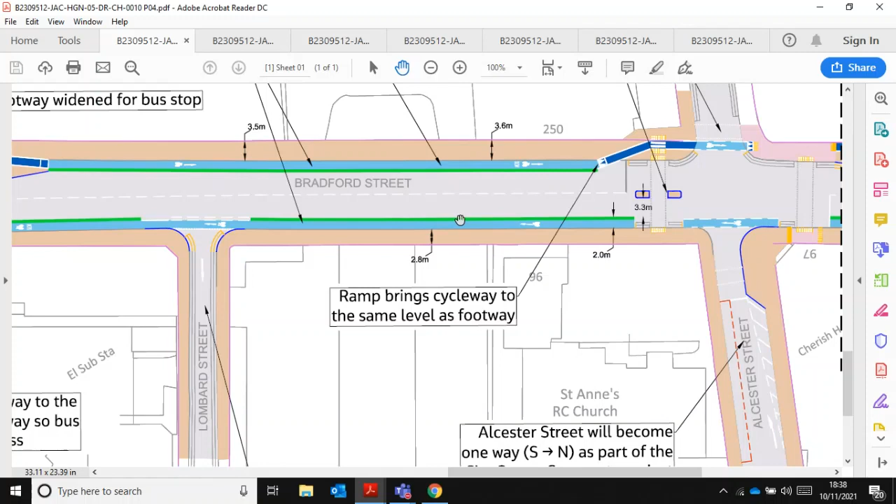If you're thinking of crossings for cyclists, where there are signal crossings at the moment, on some of the busier junctions like Rea Street, I think we are looking at incorporating facilities for cyclists within the signals. Alex might be able to confirm that.

Yes, we will be. Because of the speed at which the pop-up routes were implemented, we couldn't do significant signal changes. So at the moment, cyclists either have to wait and look for gaps in the traffic or dismount and cross as a pedestrian. But yeah, the scheme should overcome that for cyclists.

I've got another question from Ryan: will there be any additional lighting added to Bolton Road? Also, will Bolton Road be resurfaced?

In terms of lighting, we haven't looked at doing a lighting review at the moment, but it is something that can be done. There are design standards for lighting on that type of road. I suppose at the moment it's only classed as a fairly residential road, so if we are trying to encourage cyclists to use it, we can look at whether it needs a higher standard of lighting.

Generally, resurfacing is done through our maintenance contractor Kier, and we try to avoid spending a lot of the cycling money on resurfacing because it really drains the budgets for other measures. But we do need to look at the condition of Bolton Road and those roads along there in the channel. So hopefully where we're segregating for cyclists, we can at least look at, probably not full resurfacing, but patching up the worst of it and improving the surface for cyclists. As Alex said, in some areas we will look at blue surfacing, but that will tend to focus on key conflict points like junctions rather than being done throughout.

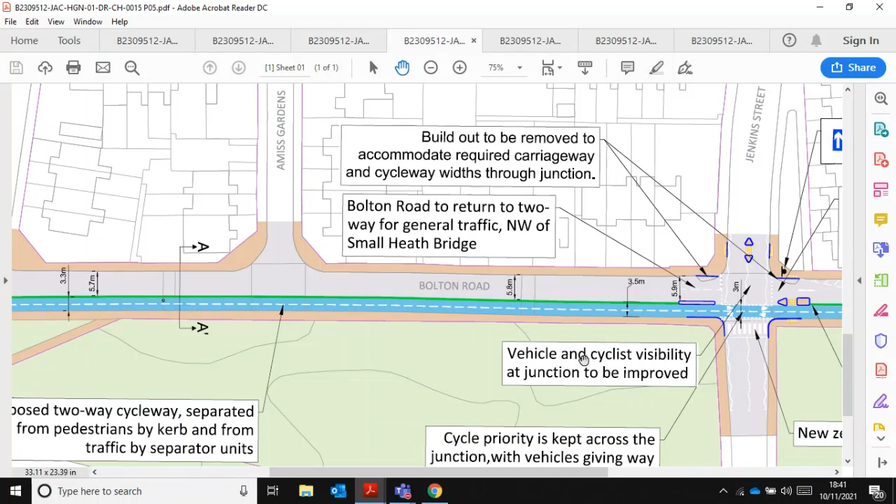Got another question from Ryan: will there be a cycleway cleaning schedule put in place? I don't believe they are currently cleaned and cleared - the A34 between town and One Stop isn't great in places. Yeah, we do have cleaning schedules with the existing blue routes, but unfortunately they're not as regular as we'd like them to be. There's complaints particularly about litter on the A34 and on the A38 down to the university - quite a few leaves and things that cause problems. It's something we're talking to our maintenance teams about, both regular cleaning and winter gritting. There's been discussions on the width of the tracks and what equipment can get in there, because the brush truck cleaners are quite wide and need a certain width. In places where the cycle routes are narrower, it's more like hand cleaning or the small sit-on equipment they have in the city centre.

Okay, thank you for that. And another question from Chris: if travelling from Trinity Terrace to Bradford Street, the route across the crossings appears convoluted - is there a possibility to simplify this? Yes, we could look at alternatives there. We did think that would possibly be the easiest route across Trinity Terrace, given the existing layout, but it's something we could take back to our designers and look at to see if there's anything further we could do there.